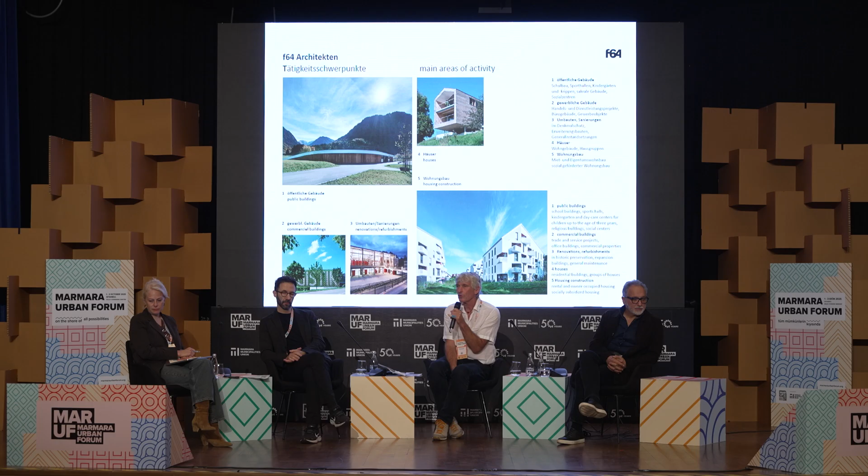So our main areas of activity are, at one point, public buildings. Here you can see the Nordic Center in Oberstdorf. It's built for the Nordic World Cup. Then we are also doing plannings for commercial buildings, renovations, refurbishments. And of course, at first we started by planning private living spaces, houses. And also we are doing housing construction for owner-occupied housing or socially subsidized housing too.

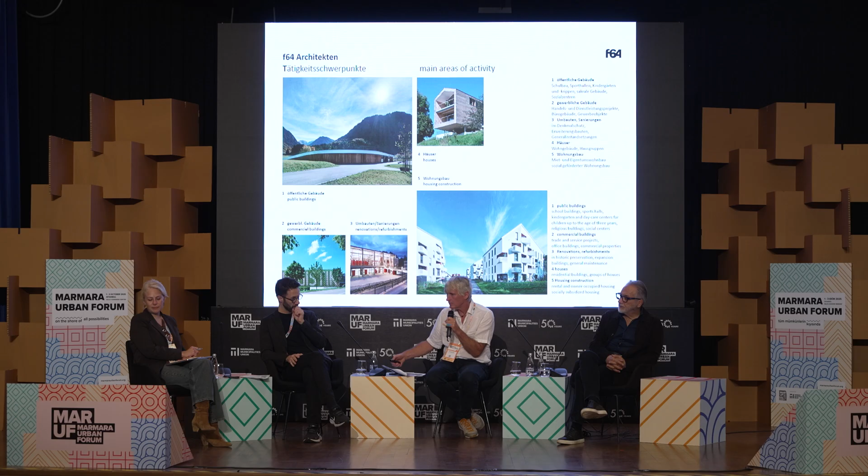So, also an important point of our activity are sustainable constructions. So here you can see the community hall. I'm going to show you afterward. Children's daycare, also the commercial building Elobau in Leutkirch, and also in St. Afra Church, we built a memorial hall and a community hall in the center of the very small village.

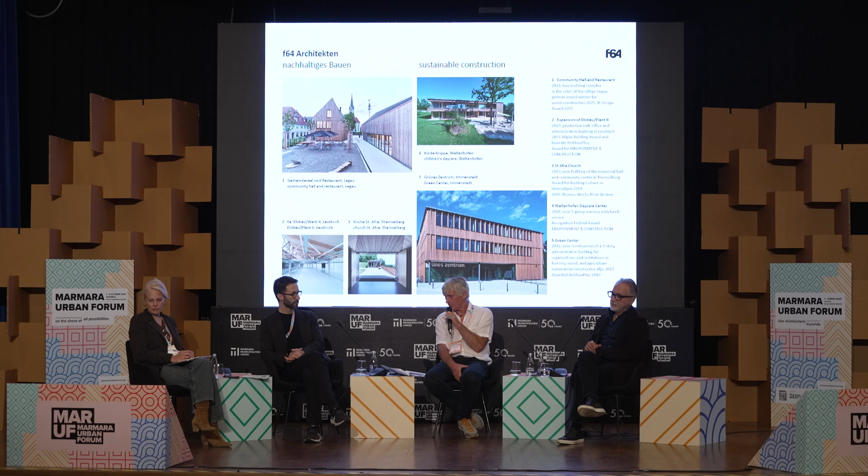So now I chose the project that I think we have successfully implemented, wall building and well-being. So it is a community hall and a restaurant in a small village. Only around 3,000 people are living there. So with this project, we've been one of the 4 award winners for German wood construction in 2025.

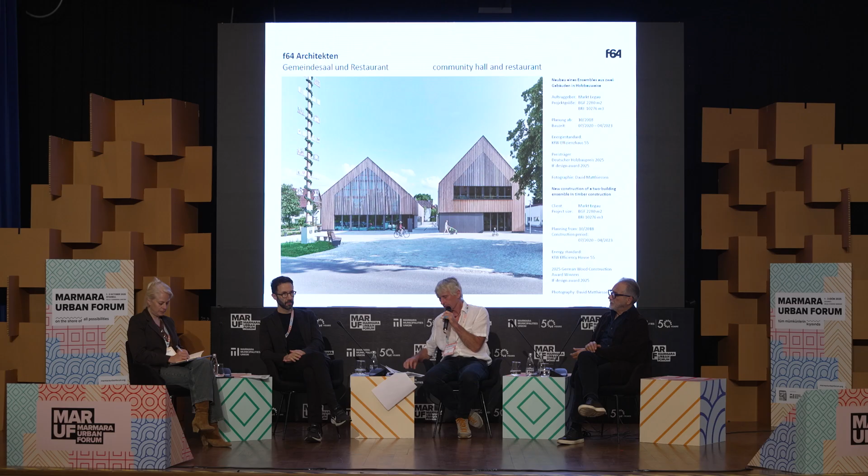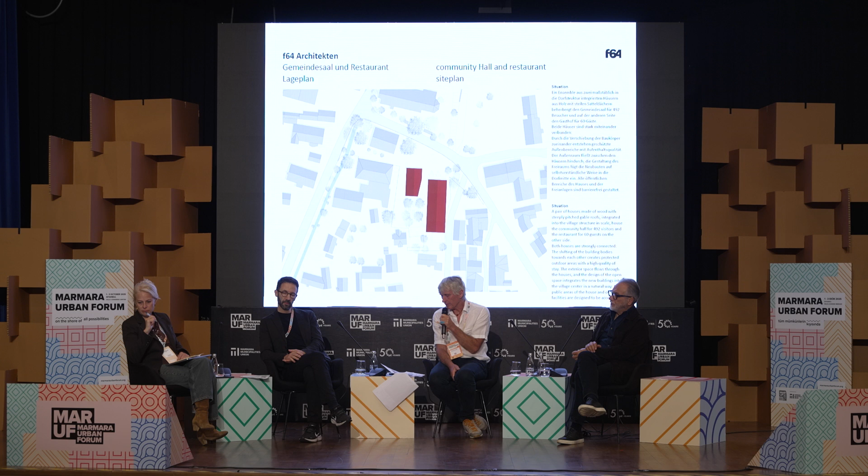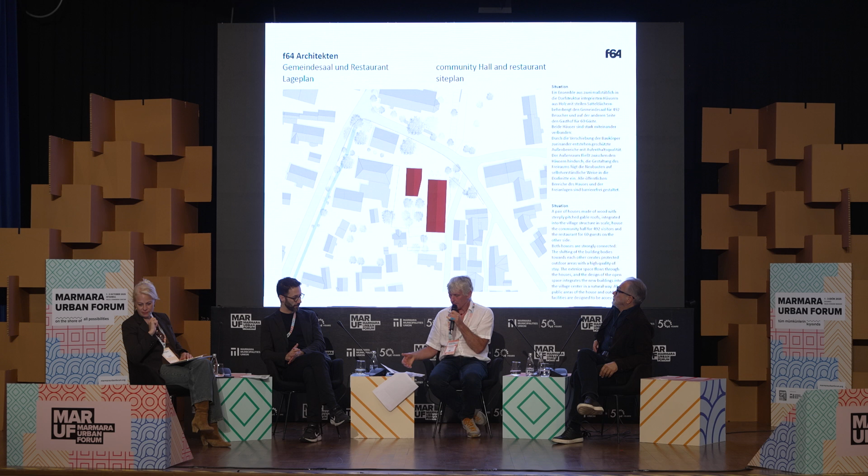So, to the situation, the restaurant and the community hall. It's nearby the church and also the, I don't know how to say, wie sagt man zum Rathaus? It's a town hall, or yes, okay. So the town hall and a church and our restaurant and the new hall. It's building in the marketplace, and at the other side there will be a beer garden. So inside.

So you can see it here in the aerial view of Legau. So combining the use in one building would exceed the scale of the site, while dividing into two building bodies allows for exciting permeable open spaces and diverse connections between indoor and outdoor. Beside the town hall in the west and the church in the north, at a slightly greater distance, the two gables of the community hall shape the space of the market square. To accommodate the scale of the densely built residential area, the roof of the hall building is pulled down more gently into the south to minimize the impact on the southern neighbors.

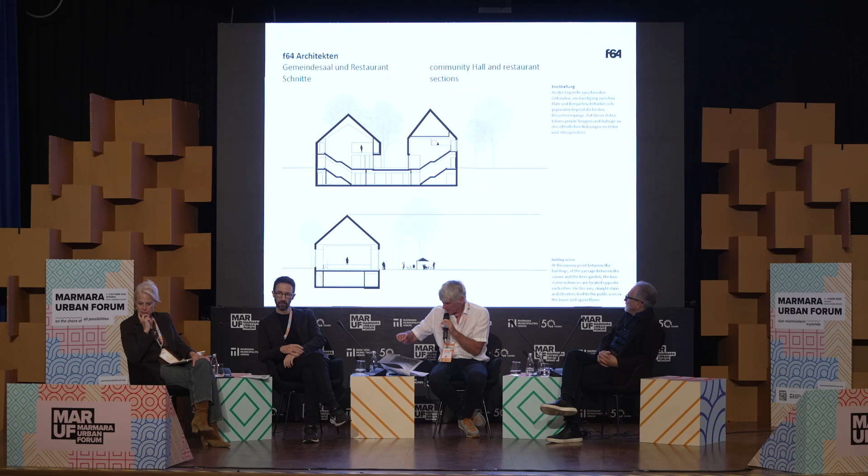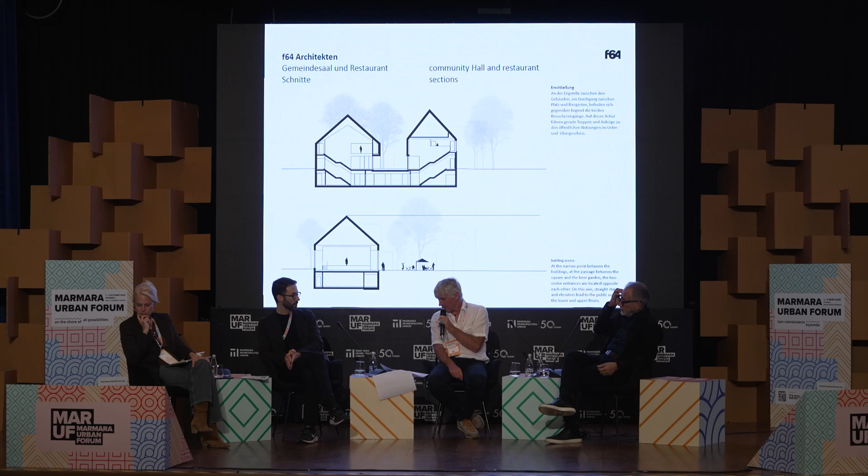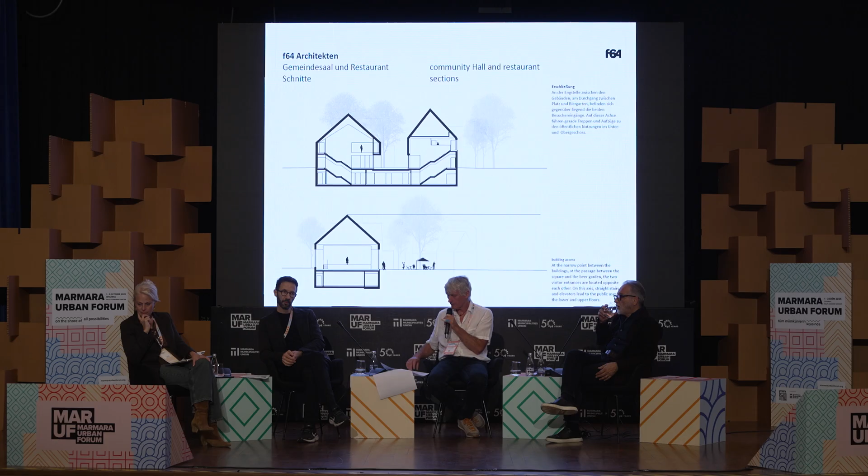So this. At the narrow point between the buildings, at the passage between square and the beer garden, there are the two entrances to the restaurant and to the hall. And on this axis, straight stairs and elevators lead to the public uses in the lower and the upper floors. So it's characteristic. So, okay, it's already done.

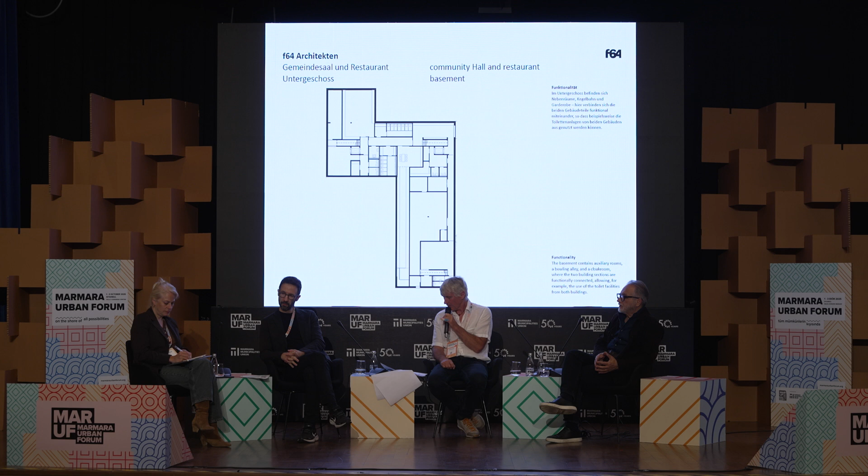In the basement, the two houses contain auxiliary rooms, a bowling alley, a cloakroom, and the two building sections are functionally connected, allowing, for example, to use the toilet facilities from both buildings. So, and up there, thank you.

In the ground floor, here you see the passage between Market Square and the beer garden with the two entrances. So both houses are strongly connected. The exterior space flows through the houses. The two building sections are connected in the functional base, the ground floor, with rooms for meetings and community experiences where the village's community is palpable. So also in the community hall, the facade to the beer garden can be opened and can be used for weddings or something like that.

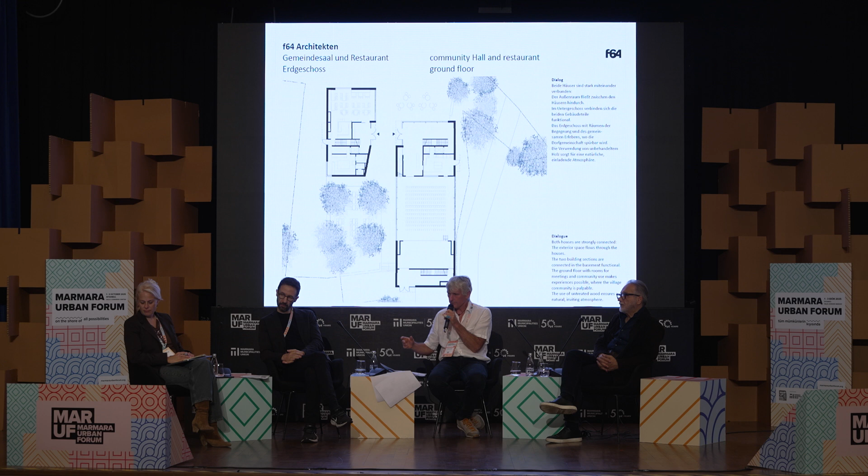So we try the maximum of sustainability with using CO2 neutral building materials, short transportation routes through selection of building products and systems by using regional wood. The value creation and strengthening regional networks, detachable connections, prefabricated constructions, renewable natural materials, and untreated wood from sustainable forestry. High durability of materials, recycled or can be recycled.

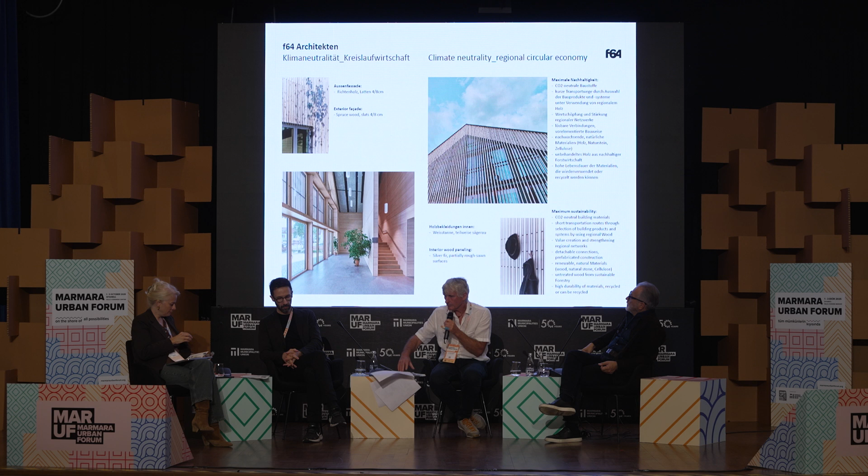So the use is confirmed for the villages, for clubs, and it's tailored to the needs of the village of Legau especially. A space for encounter and shared experience is created, where the village community becomes palpable, from cultural events such as theater, musical performances, and fancy dress balls during the carnival season, to private wedding celebrations. They find their place here. The use of untreated wood ensures a natural, inviting atmosphere.

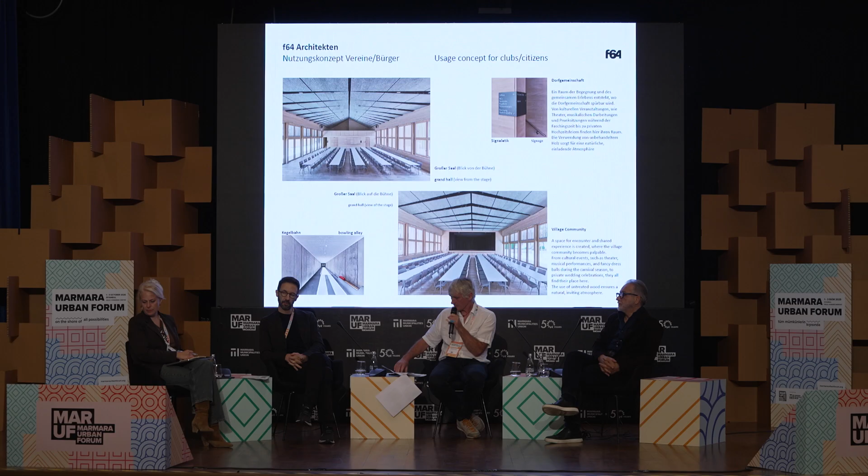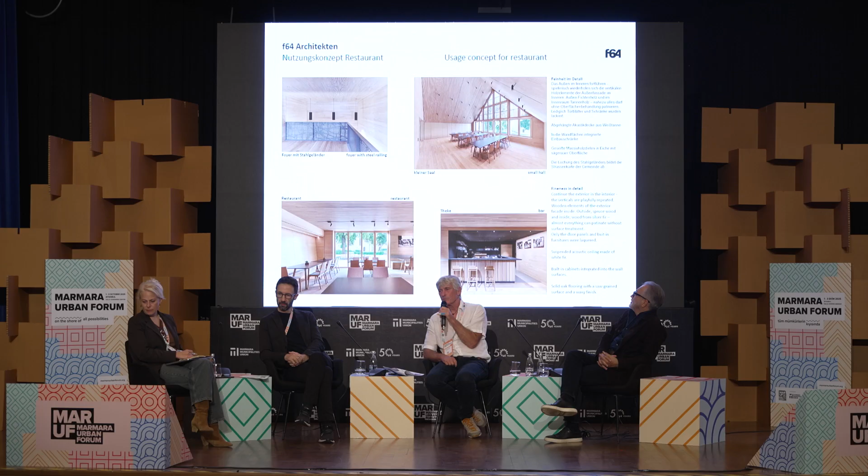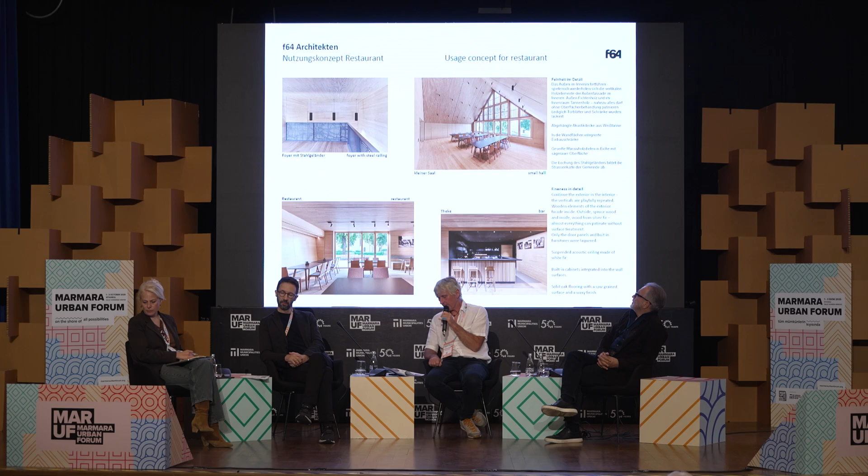At least it's also a special thing of F64. We are looking for the finest in detail. So, for example, the foyer with the steel railing, we tried to rebuild the streets of the village like an abstract map. So you can see it in the photo. And over there you can see a small hall. It's just over the restaurant. It's used also for weddings because from the window you can see the front of the church over there.

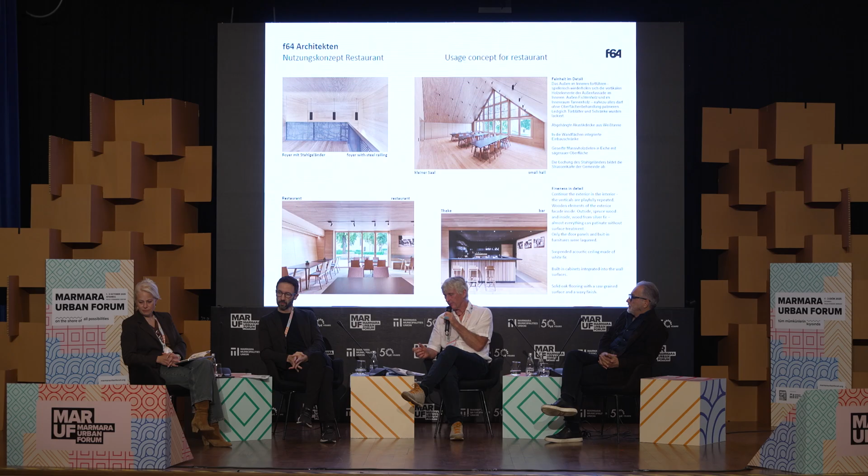So then the other picture is one of the restaurant down there, and down at the right you see the bar, and we tried there to continue the exterior into the interior. So you see it on the next photos. I took some photos from exterior shots. The facade is done with, I think it's called furs or something, Fichte? Spruce. It's spruce, yeah. Outside we use spruce laths, and inside we used white fir for the wood, also rough sawn.

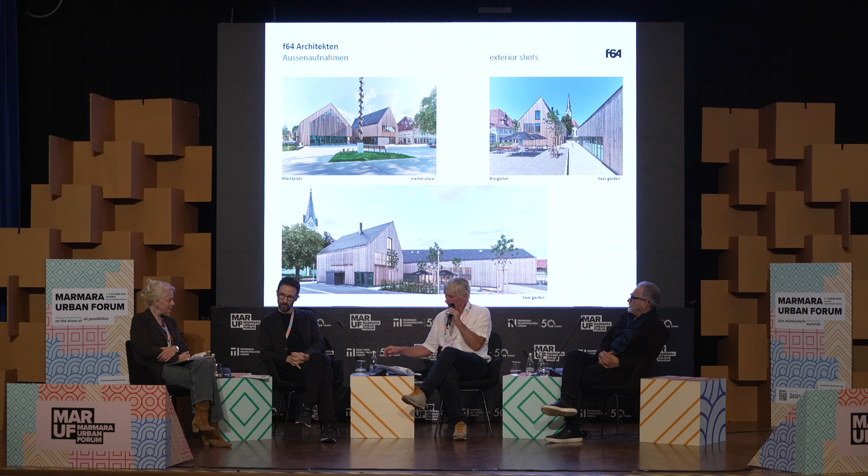So I think this was the last one, and at least, if anybody is thinking about our name, it's the name we gave our office. It was when we started in 2003. At first, we had to renovate an old house in the city, and then it became the red one. We called our office like the street name. So it's quite easy. We didn't want to use our names altogether.

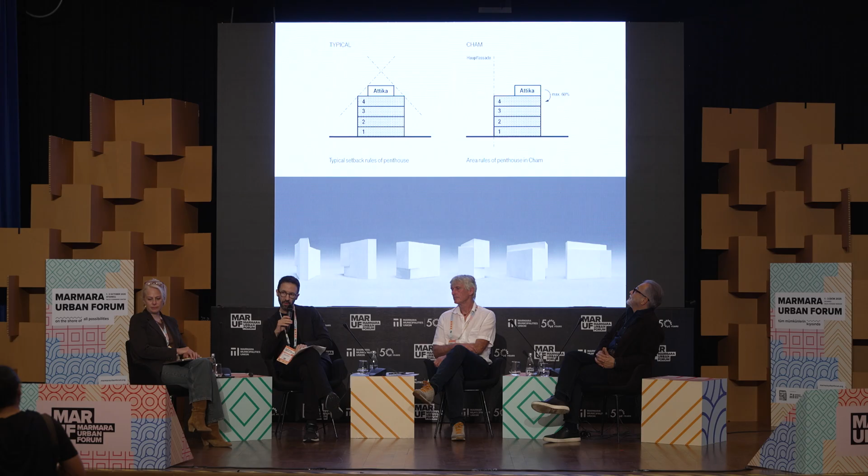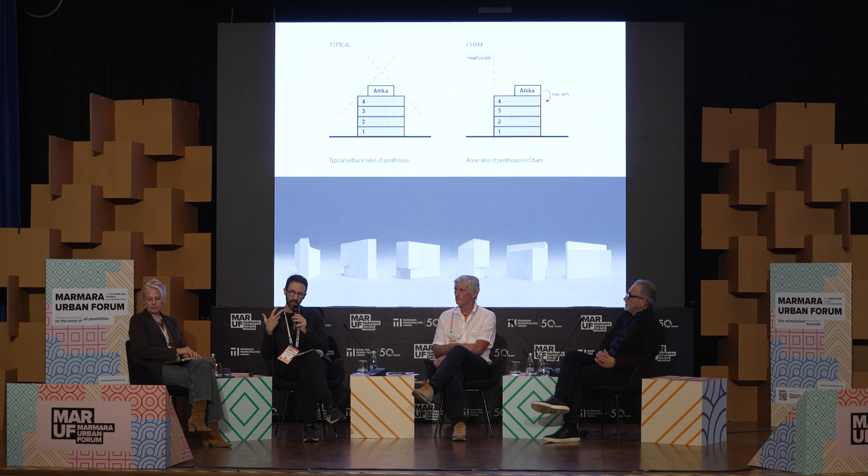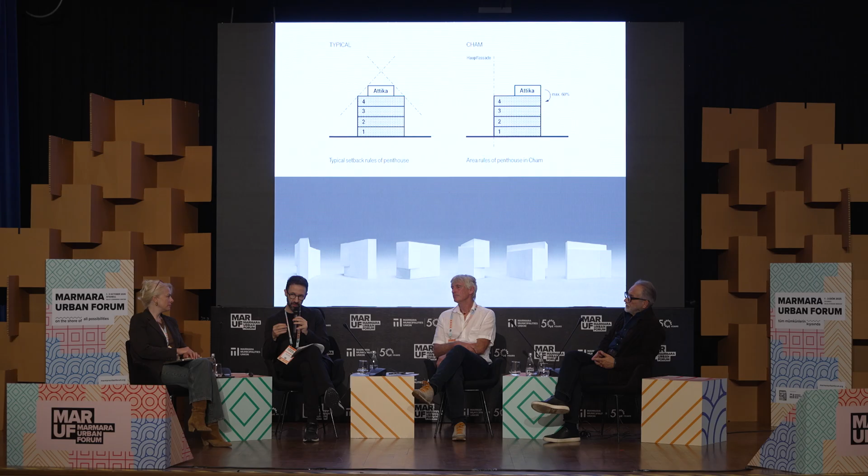A discovery in the local building code allowed us to rethink what we call the Attika, the penthouse level on the top of the building. Instead of doing a typical add-on on the top, we were able to integrate it more directly and seamlessly into the volume, and also allow the volume to protrude out of the footprint on lower levels. So instead of responding to each site or program requirement with an add-on, we allowed the form itself to essentially mutate where needed, to peel off or to merge. And so the building seems to change its perception when you move around it.

There's an ambiguity of it sometimes looking very singular and slender, and in other moments looking more like an aggregation and merge of different elements or volumes. Based on the different conditions of this triangular shape, we wanted to come up with a living experience that would capitalize on this form rather than fight it or work against it.

So for us, it was interesting to think of two related spatial anchors, the panorama room and the central hall. The panorama room would be the selling point for the slender apartment to the west, an apartment for extroverts with multiple views and exposures.

The central hall, that would be more protected by a crust of spaces around it and would characterize the deep plan of the apartment for introverts.

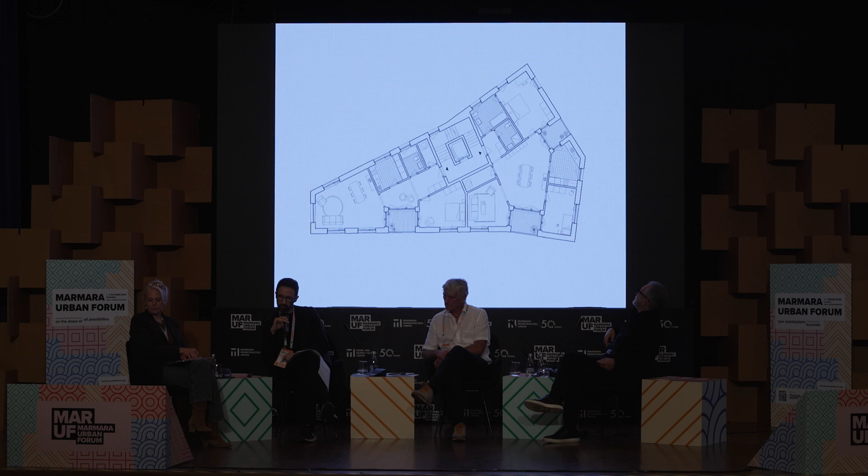We wanted to create essentially a formal logic that would create a coherent plan. The two halves of the building have very different spatial conditions, but should be derived out of the same DNA. And the logic of the subdivisions should translate into distinct spatial experiences. So we explored this idea with a cellular plan, a non-hierarchical collection of rooms without corridors, where movement happens directly from room to room.

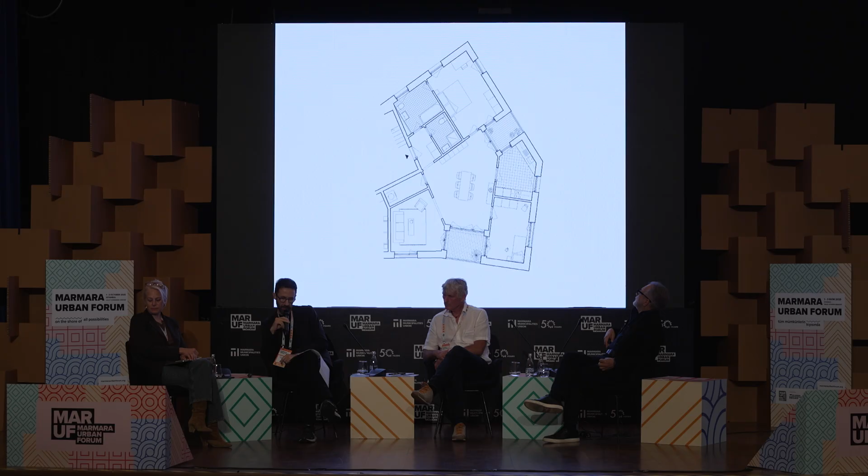This is particularly the case in the deep apartment, where the organizational logic of the plan takes full advantage of the depth and the geometry. Building depth shouldn't be just a problem to solve. It becomes rather an asset and an added value for the apartment.

Surrounded by a collection of cells, like individual rooms, loggias, kitchen, bathrooms, this central hall invites its inhabitants to give it meaning, to give it a kind of tailored use and react to their specific needs and lifestyles. It's a space that's landlocked, caught within this deep center of the plan, but it becomes completely porous and dynamic, with light and views in all directions.

The loggia, just like another room, is integrated into this kind of logic and has access from all three sides. It's this immediacy of the different spaces to each other that allows for very different, let's say, ways of inhabitation in this apartment to unfold.

The central hall becomes the center of life in the apartment, a space that's undetermined and really open for interpretation, a space where paths cross, where people meet, but also that really retreats from the outside and becomes only for its inhabitants.

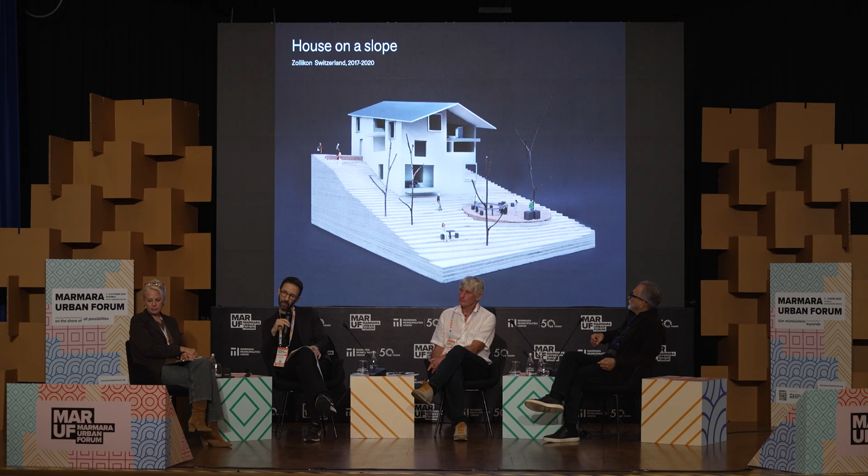The second project is called House on a Slope. It was completed in 2020, and it's a housing project for 5 apartment units in an affluent villa neighborhood with lake views just outside of Zurich. Unlike its monocultural context of single-family homes, our client was interested in creating more of a diversity of units that would attract a wide range of mixed income renters and that would create a small community on this lot. So the apartment building is disguised to look like a single-family home, but its internal organization is far from it.

Most of the time when building on a slope, we see projects that maximize or intend to maximize the building envelope by approximating the slope through a terracing. Especially in this area, developers have used the view, the lake view, to market the terraced housing typology. In our view, though, this creates self-similar units, all oriented in one direction, putting the view above other qualities and essentially diminishing the overall result.

We chose, instead of directly following the slope, essentially offsetting the existing terrain as a literal application of what's allowable to be built as an envelope. This allowed us not only to integrate the building into this single-family context with the gable roof, but also to produce a series of radically different, distinct spatial characteristics.

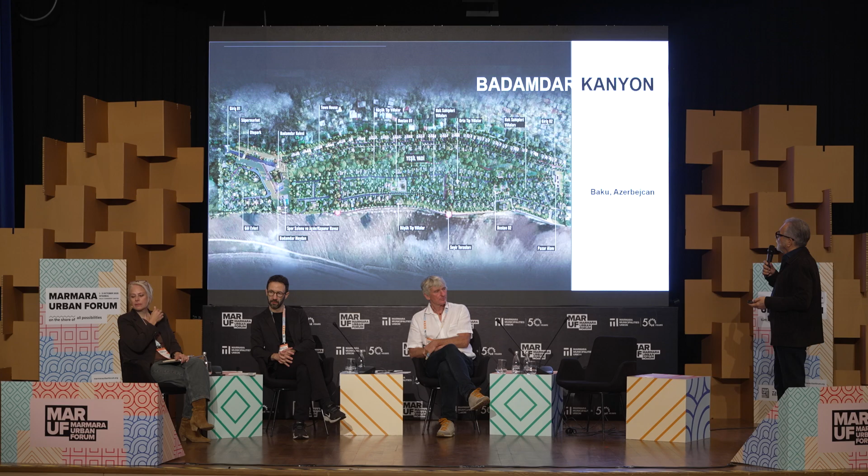So sustainability as a concept is not something that you just wear as a badge. You have to live the idea of sustainability, and it has to somehow form the holistic construct of how you do things, how you go about your business, whatever area of life that you're dealing with. And these three elements of the ecology, the economy, the equity of society have to be all considered at the same time. And Badamdar Canyon, the project that I mentioned, actually gave us that opportunity.

We were invited to a competition. It was a competition between 4 different architects. It wasn't actually concluded. It's kind of still in the air. We don't know what's going to happen. But it gave us an amazing opportunity to think about sustainable living on a large scale. We've had similar projects before, but in the middle of the pandemic, it meant something else. It had a different sensation.

And this piece of land, a barren piece of land, is in Baku, looking over the sea. The sea is to the south of the picture. A plain which is completely exposed and landscapeless, actually. No trees on it at all. But this is the pattern of the trees that we propose on the landscape.

And where we propose that landscape takes over, that landscape is the dominant element of this development. And wherever possible, obviously natural materials, green roofs, and if possible, some level of micro-farming so that people can feed themselves from that landscape. And being also very aware that the ethical dimension of sustainability means you have to come into contact with the culture. You have to somehow understand the context in which you're in and respond to that local geography, the local dynamics.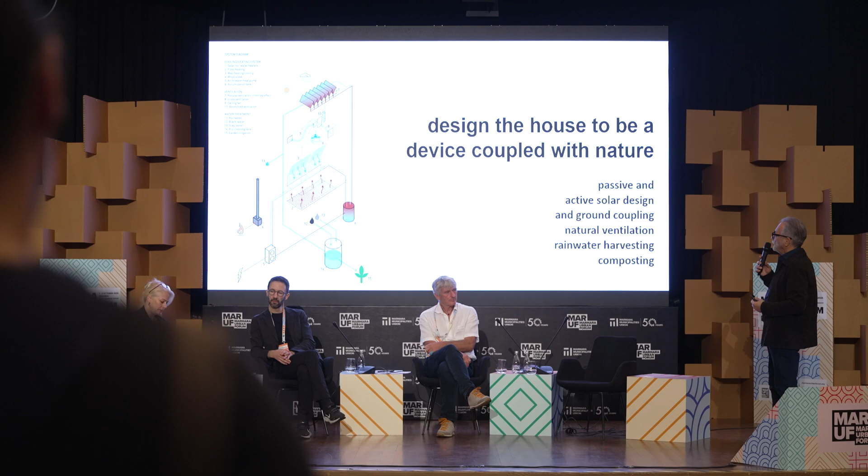But most important of all, when we come to a place, we have to study it. We have to try and understand what natural resources it offers you and try to integrate those natural resources and use them, use the potential of these natural resources. And this diagram shows you that there are many different ways, including wind power, because the site has an extreme amount of wind, and ground coupling, coupling the buildings into the ground using passive and active solar design, and obviously rainwater harvesting and composting and so on.

But the most important thing was to create a sense of human scale and always to use local materials, local stones, and bring people as close to nature as possible, that their life is infused with nature, that they're engaged with nature, whether in public spaces or in their gardens. They're open out to nature and they can come into contact with nature.

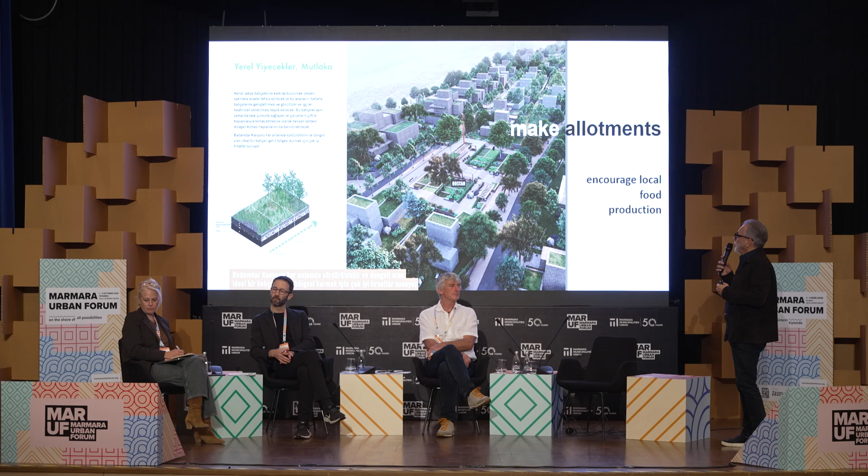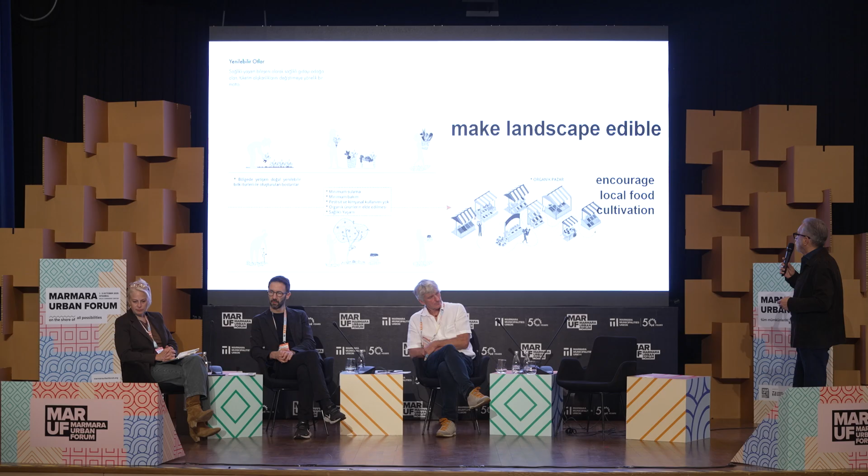And the other aspect of it was that we wanted to eat that nature. We decided that the landscape should incorporate some farming, some micro-level farming, what we call bostan in Turkey. And we wanted to encourage local food production and local farmers to come to the market and sell their produce and encourage that local food cultivation.

And the characteristic of the site, which is a bowl that creates a kind of wind tunnel, is a very strong factor. The high winds are so uncomfortable that you can hardly walk on the site. But they then give you an opportunity. So you use that opportunity and create energy from it and light the street lights. These things work very silently. And deal with the wind using landscape elements. Landscape becomes a kind of construction to mitigate the effects of climate.

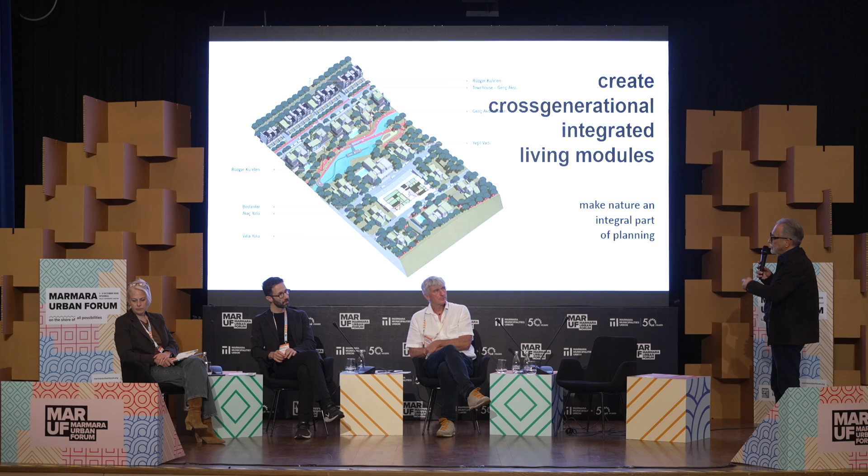So at a kind of modular level, if you take a strip out of that landscape, which by the way is 1 kilometer long, so from one end to the other is 1 kilometer, the cross-section deals with all aspects of society in some sense, in terms of its economic cross-section. So you have from the top of the site affordable housing, apartments, and then the next layer and the next layer until you get to larger and larger buildings, family houses and villas, where the mix actually produces a cross-generational society, not the mono-generational society, which is what gated communities tend to produce. And of course make nature always an integral part of it.

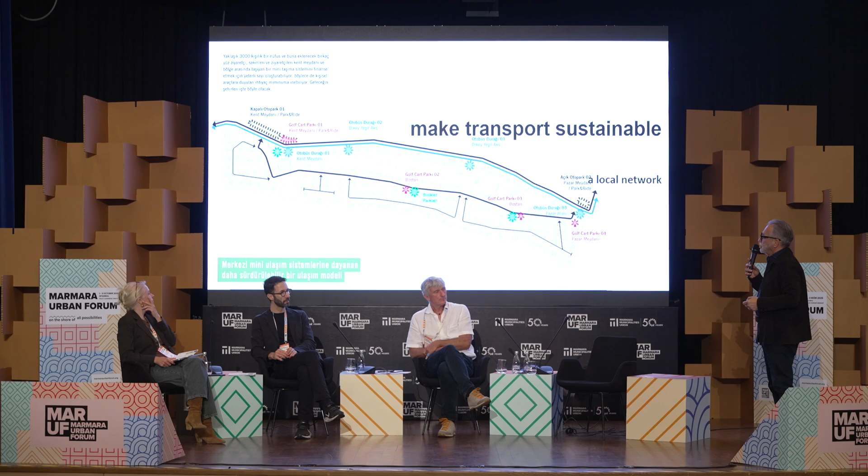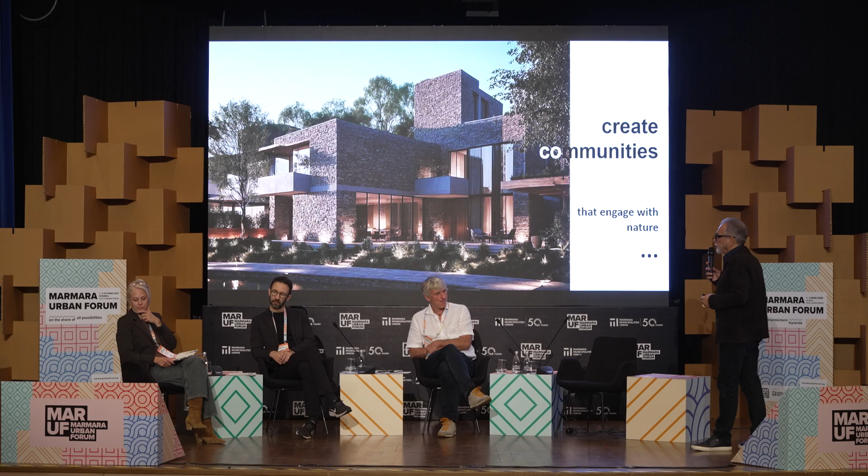So jumping from there to another scale, I want to talk about our approach to sustainability and well-being in different typologies. This is a project that we're doing in Slovenia at the moment, in Kotlje, which is up in the mountains, not very high, about 1,000 meters. A spa hotel where from the ground, mineral water, iron-laden water comes out. And this hotel is designed for visitors to come and take the waters and relax and get healthy, basically. It's in the middle of a forested piece of land, and you're surrounded by mountains. It's amazing. It's a beautiful place, very quiet.

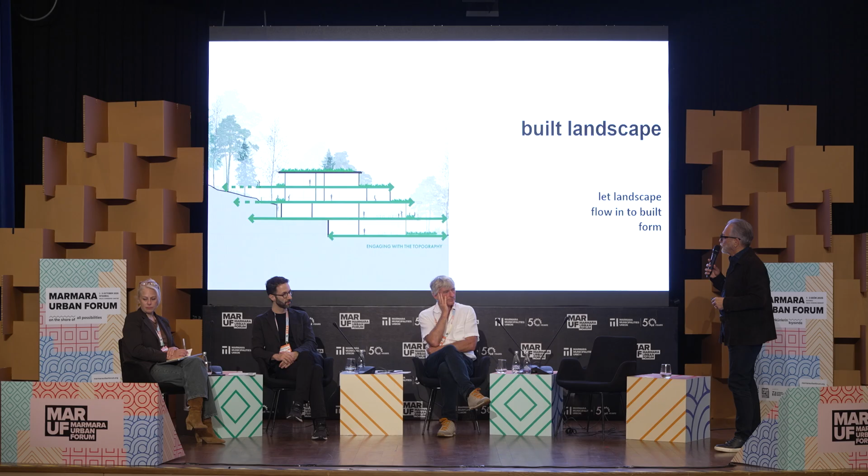So there we wanted to, again, touch the landscape lightly and engage with the landscape in the most literal sense. So the hotel becomes something that kind of slides out of the landscape. So the plates of green roofs appear as if they're engaging with the topography and coupling with the landscape in more ways than one. Ground coupling, again, we always propagate the idea that you must engage with the landscape both below the ground and above the ground.

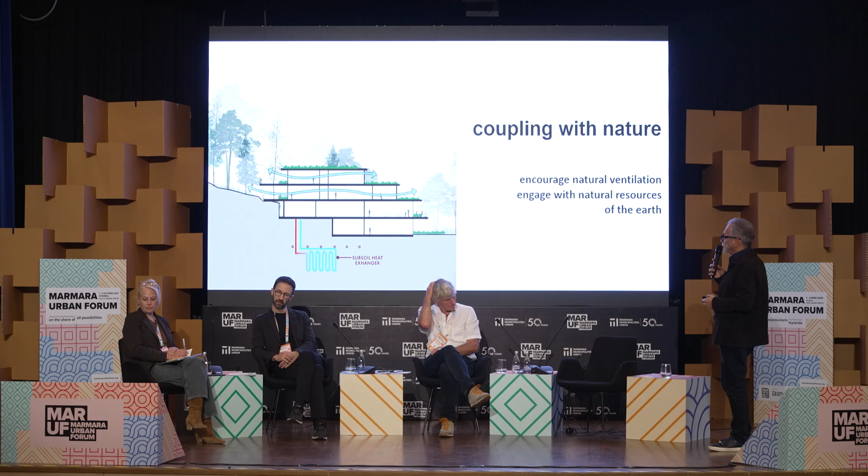So here we use a heat exchanger, which is a ground-based heat exchanger, and also encourage natural ventilation. It's a very small hotel. It's about 20 rooms. There's a spa where you can take the waters, a bar where you can drink and eat the food, and look out at nature, basically. So this view is looking at the mountains behind me.

And on the other side, where it's coming out of the hill, the landscape literally engages with it, and parts of it actually become intertwined. And right now, actually, it's well beyond this point. This is a camera on site.

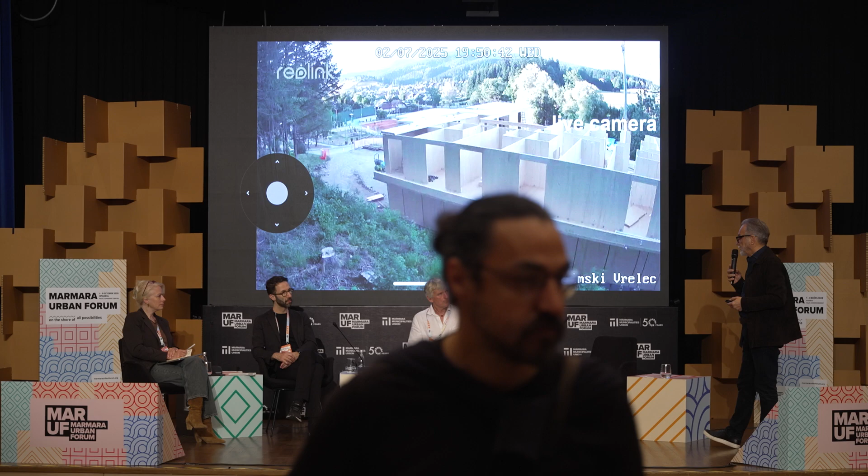The other interesting thing about this project is that we applied for European Union funding, which encourages energy efficiency and ecological sustainable buildings. And one of the early decisions was to use timber as the main structural element, and it was my first experience with CLT. And I must say, it is one of the most surprising materials. I think you use it as well in your projects too, I noticed.

And that's the thickness of the walls. The walls are very, very thin. It's a material that's stronger than concrete, believe it or not, and even more fire resistant than concrete sometimes when you cover it properly. So this is the state that it's in right now, and it will be completed next year, and hopefully you will all come and taste the spa waters.

This project is jumping to another function, which is an office building, an office in Ankara, the Contractors Association in Ankara, which was also a competition. And it's a small building, which is the headquarters of the major contractors of Turkey, whose aim was to create a building at the highest possible level of sustainability. They wanted also to demonstrate the quality of Turkish construction and the finesse with which they can make things happen.

But one of the main objectives was to make a highly energy efficient building, and our target was to cut by 50% the energy requirement of the building compared to a standard building. And to do that, you have to do extreme things. You can't just put shutters on the windows.

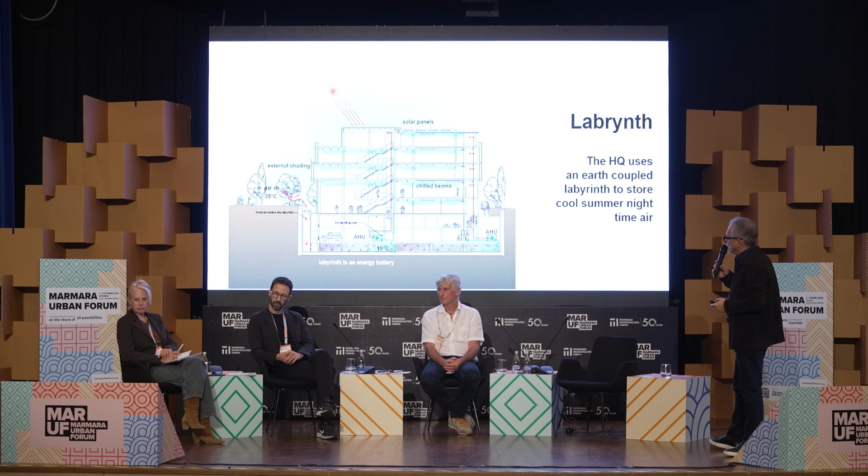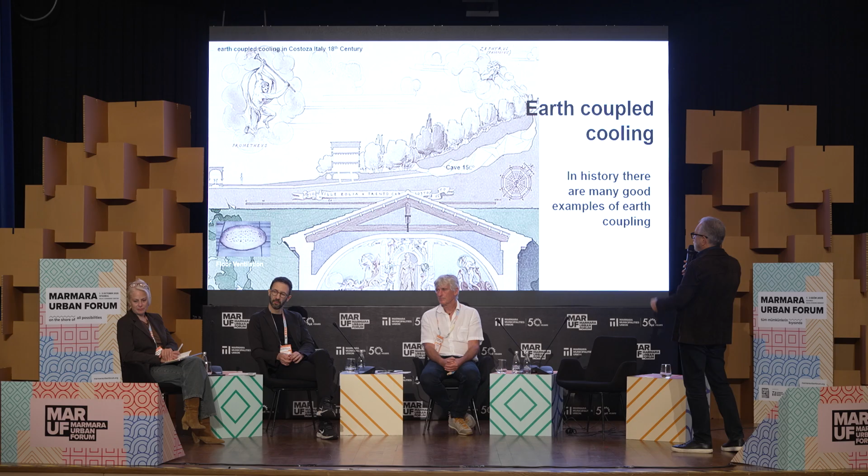So what we did is we created a labyrinth below the building, which is like a cave, a dark cave, and we pass the air through the labyrinth in some way similar to historical examples like this. This is a building in Costoza in Italy, where a cave was literally used to draw air into the building through floor ventilators there. Just on the left you can see. And this system is very similar in that sense.

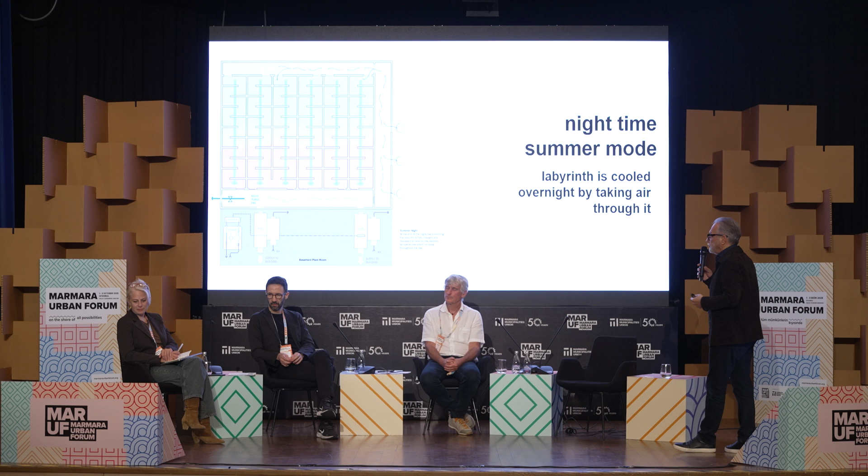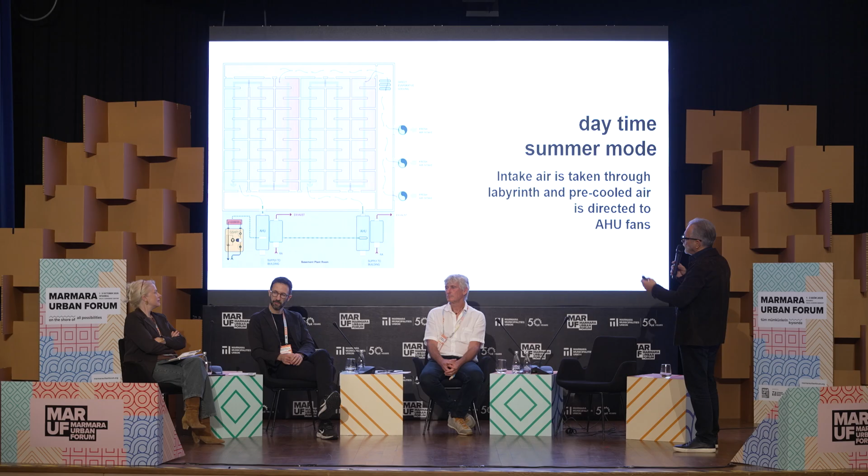So this labyrinth is like a cave. And in the summer night, when the temperature goes down to 15, 16 degrees, we cool it so the cave becomes cold. And then during the day, when the weather is hot, you take the hot air in through the labyrinth, and it naturally cools the air down to 17, 18 degrees.

And in winter mode, actually, it works in the opposite direction, because in Ankara, it goes down to minus 15 degrees. It gets very cold. But down below, it's still 15 degrees plus. So you have a delta T of 30 degrees, whatever you do.

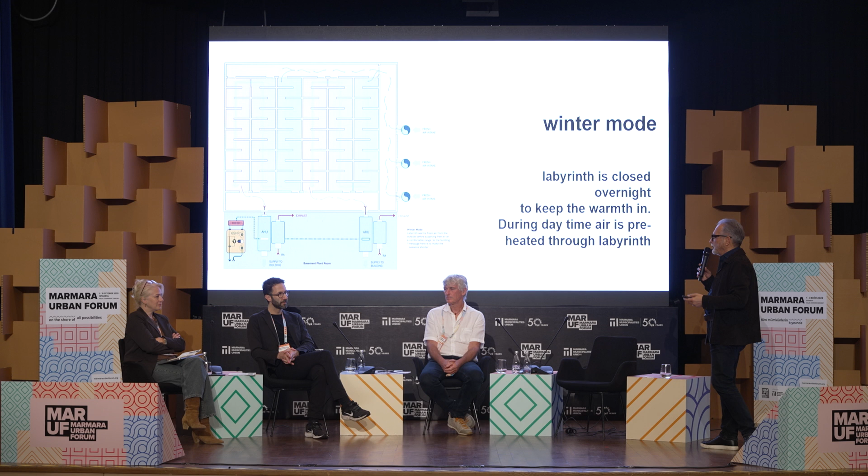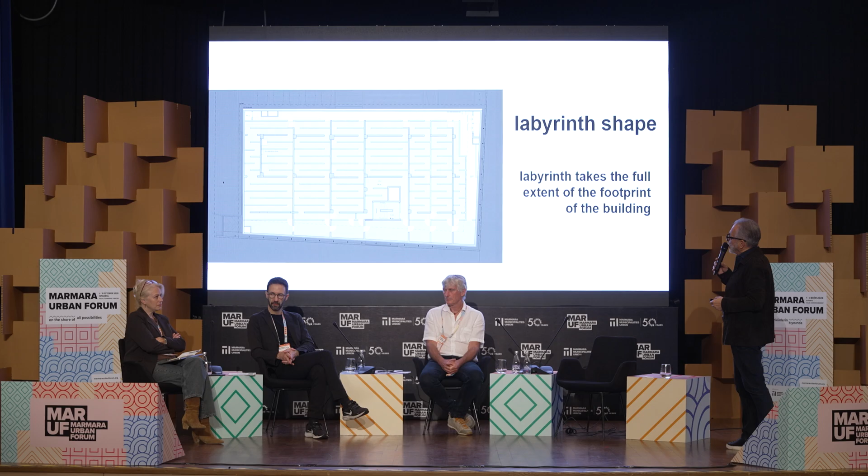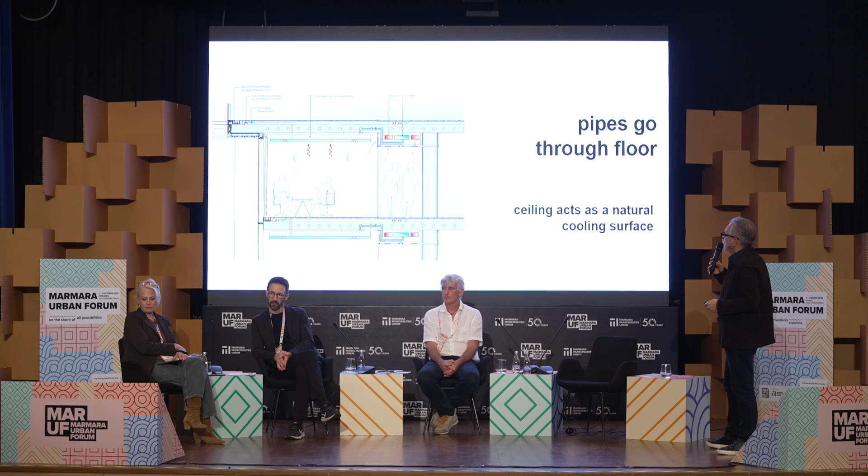This is the actual shape of the labyrinth, because the site is a bit strange. We used concrete blocks as heavy as we could find, as thick as we could find, because the whole idea is the weight. The weight is what contains the energy. In other words, it sucks the cold or the heat, and then it releases it gradually. So those louvers you see are automated, and they're controlled by a building management system.

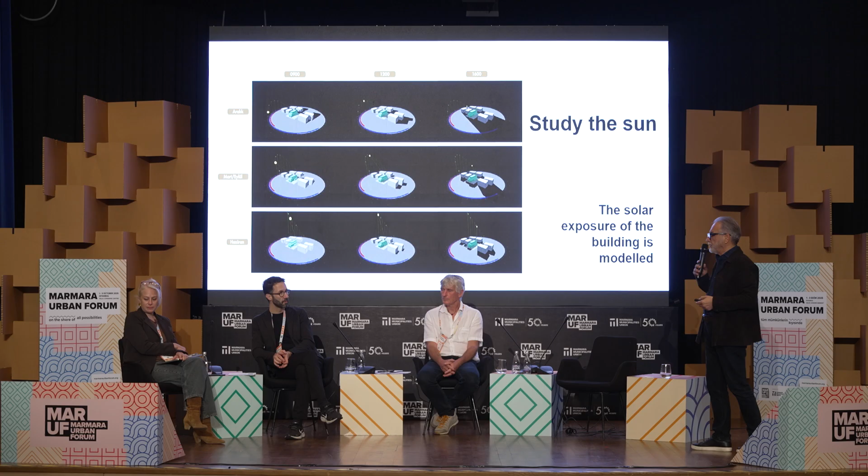We also pass air pipes through the concrete floor, so the concrete floor becomes an active source of energy as well. And they are then supplying the chill beams which deliver the air down to the people below. And obviously, you have to do very intense solar studies. Whenever we do a project, we do solar studies, and the exposure of the building actually guides the design of the building aesthetically very much.

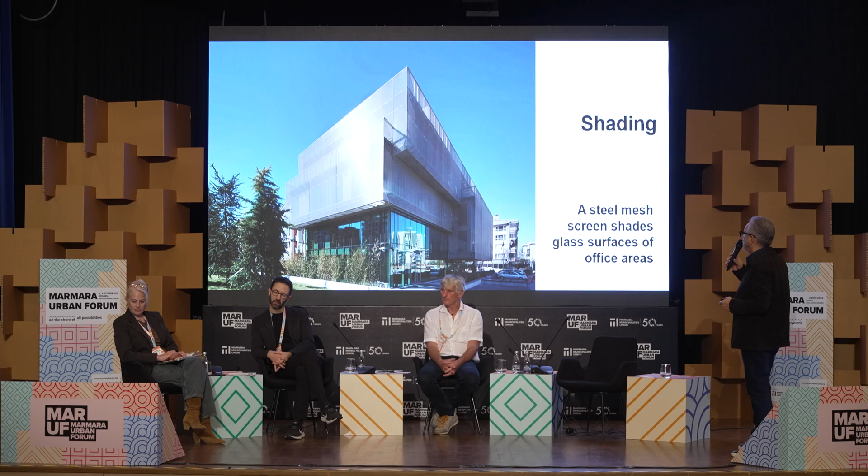And in this particular case, we wanted to experiment with steel mesh with varying degrees of thickness as it goes around the building, to create sufficient shading so that it doesn't heat up during the day, so that the loads are reduced. Of course, we put solar panels on the roof, and there are a number of areas in which efficiencies are achieved, which enable the building to get LEED Platinum.

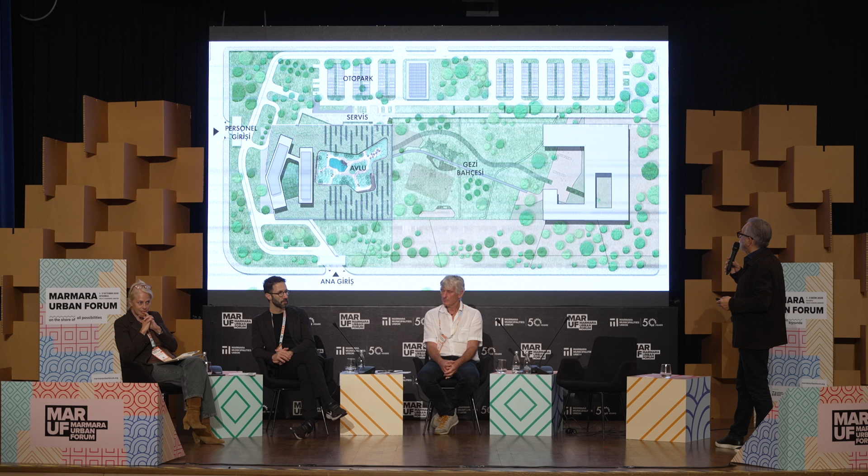This final project is an office building in the other end of the country, in Gaziantep, which is an office headquarters for a local company, but it's an international company.

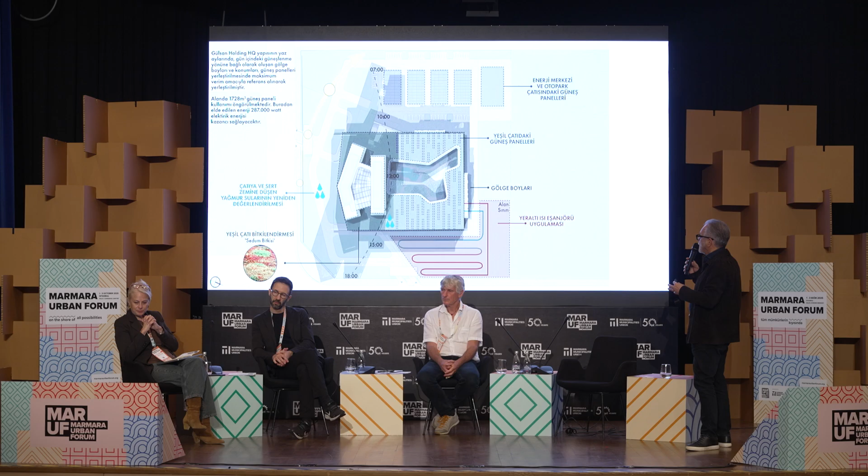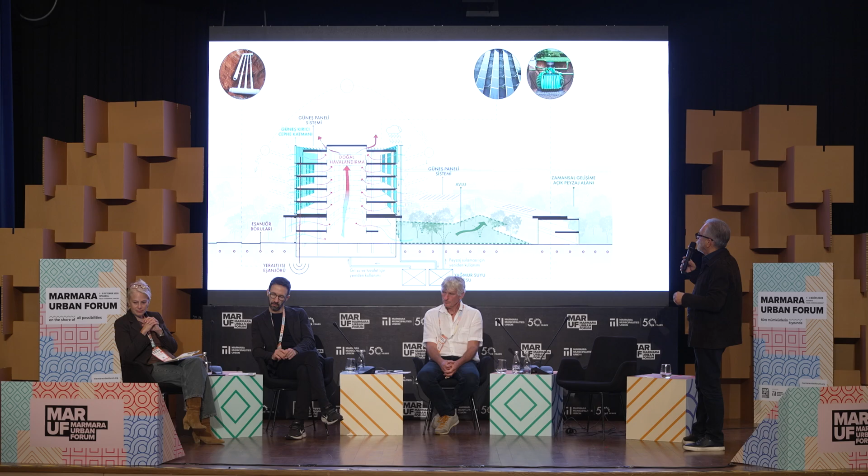Again, we always do some kind of analysis, and in this case, we use the ground, again, to couple the building's cooling needs and heating needs, and use an atrium to create natural ventilation, and surround it with green so that the people working in that building are always connected to nature.

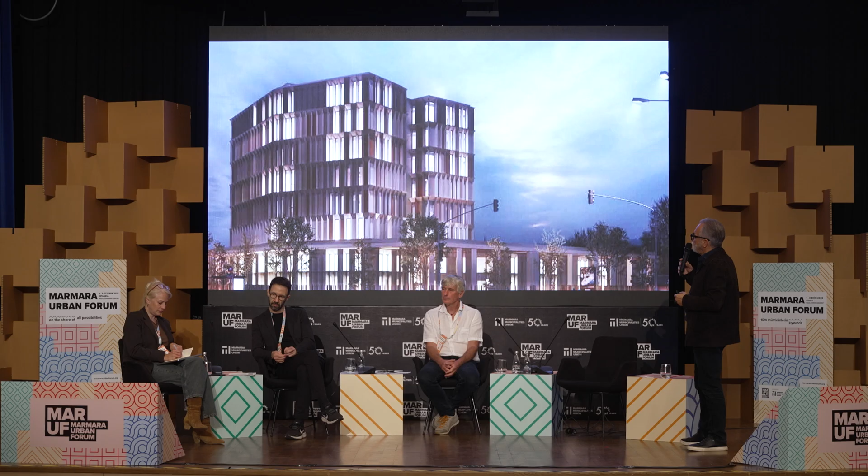And the atrium brings in light deep into the building, and outside, the building form is informed by the need for shading. So our projects are always somehow informed by nature, whether it's the sun or the trees. So these are the projects I wanted to show, and I know people can read that themselves.

But I think the point is that the well-being is very much in our hands as architects, and we are in control of many, many things. We are decision makers, and we have a huge responsibility. We are trusted with a huge responsibility. So I hope that anyone who's becoming an architect feels that.